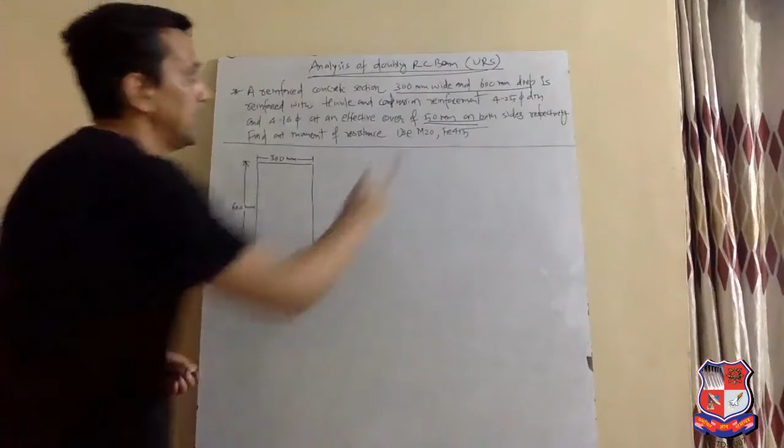It is reinforced with tensile and compression reinforcement, 4 number 25 mm dia and 4 number 16 mm dia, at an effective cover of 50 mm on both sides. This means effective cover on both sides is 50 mm respectively. So 4 number 25 mm dia are in the tensile zone and 4 number 16 mm dia are in the compression zone.

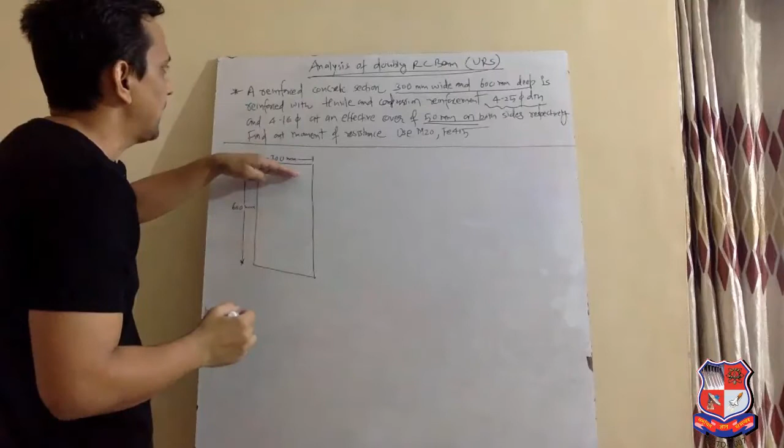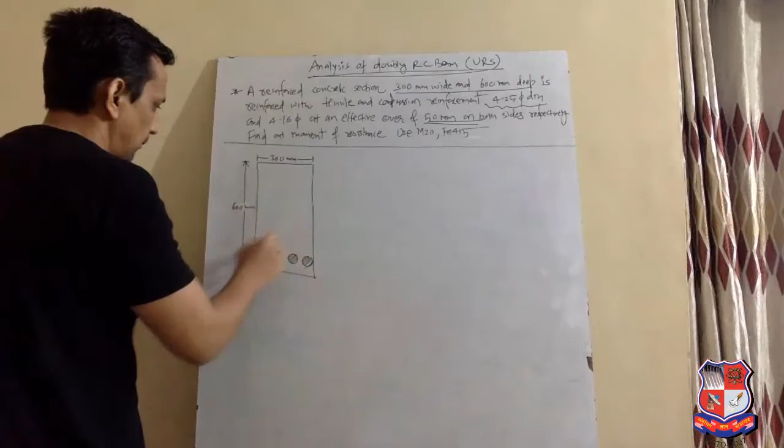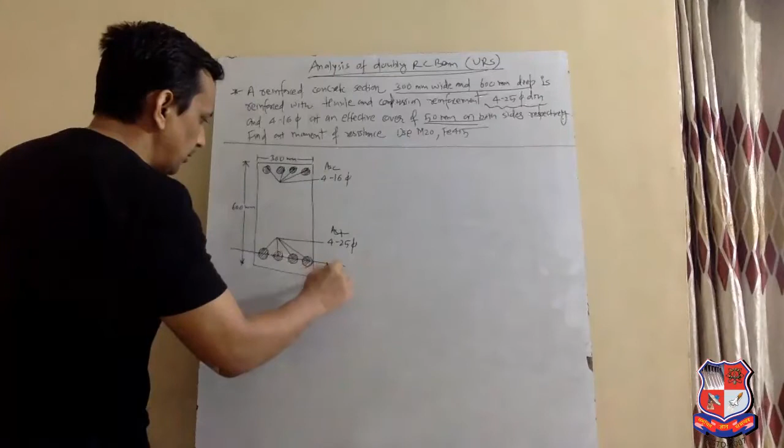Four number 25 dia, four number 16 dia. This is ASC and this is AST. Effective cover on both sides: in tension zone it is called E, 50 mm, and in compression zone it is called D dash, also 50 mm.

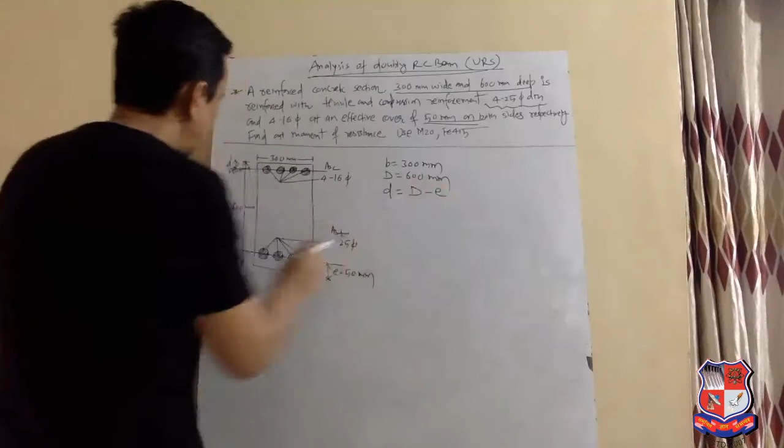So B equal to 300 mm, capital D equal to 600 mm. We need to find small d, meaning effective depth. Effective depth means overall depth minus E. Overall depth is 600 mm minus effective cover 50. So we get effective depth 550 mm.

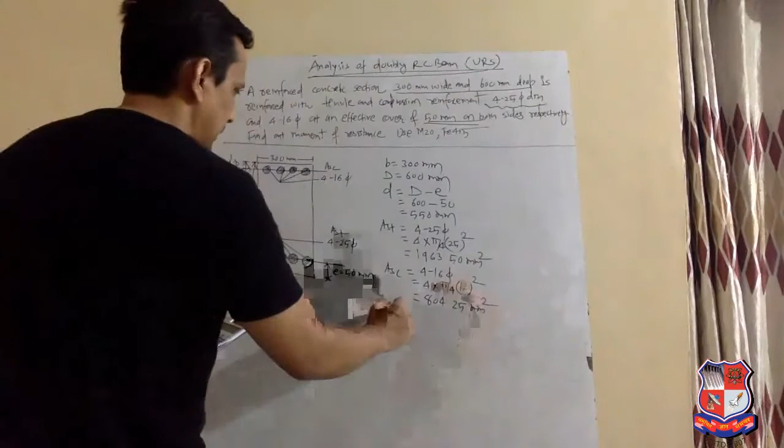Now, in tension zone, 4 number 25 mm dia bars are used. 4 number 25 dia means 4 into pi by 4, 25 square, which gives 1963.50 mm square. And ASC, 4 number 16 dia, 4 into pi by 4, 16 square, gives 804.25 mm square. E is equal to 50 mm and D dash is also 50 mm.

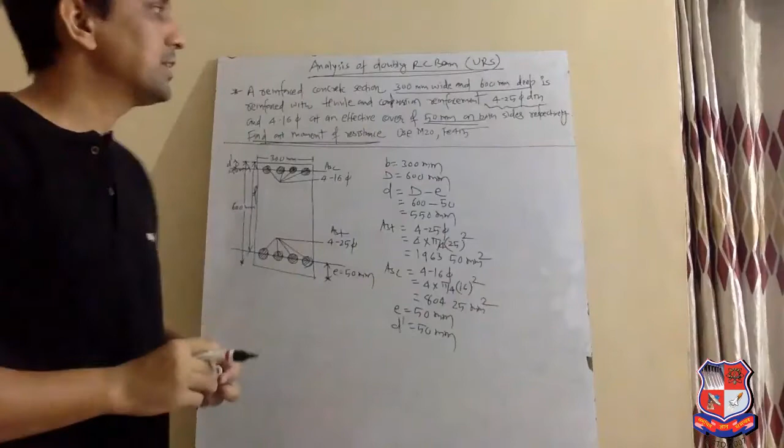So what we need to find is the moment of resistance of the beam. The moment of resistance MR of the doubly RC beam equation is C1Z1 plus C2Z2. MR is equal to C1Z1 plus C2Z2.

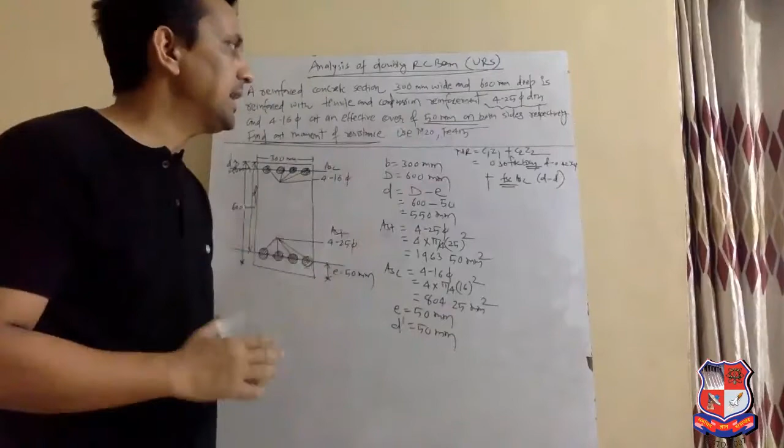We know C1 equals 0.36 FCK B into XU, and Z1 is D minus 0.42 XU, plus C2 equals FSC into ASC, and Z2 is D minus D dash. In this equation, we need to find the unknown values first. XU is the first unknown and FSC is the second unknown. If we find XU and FSC, then we can easily calculate the moment of resistance of the beam. So in this case, first we find the value of FSC.

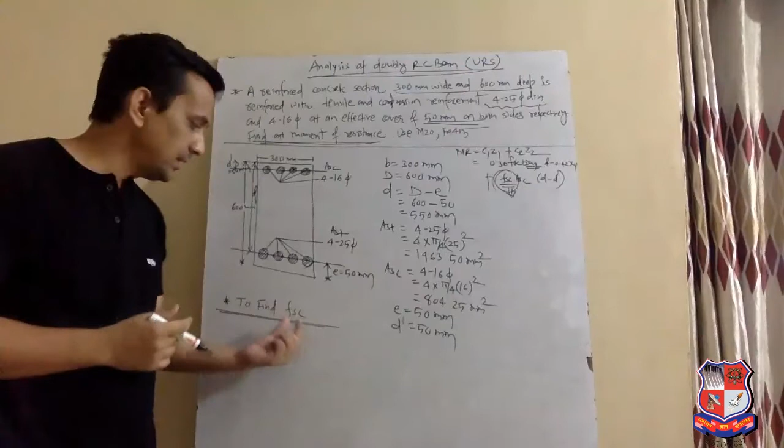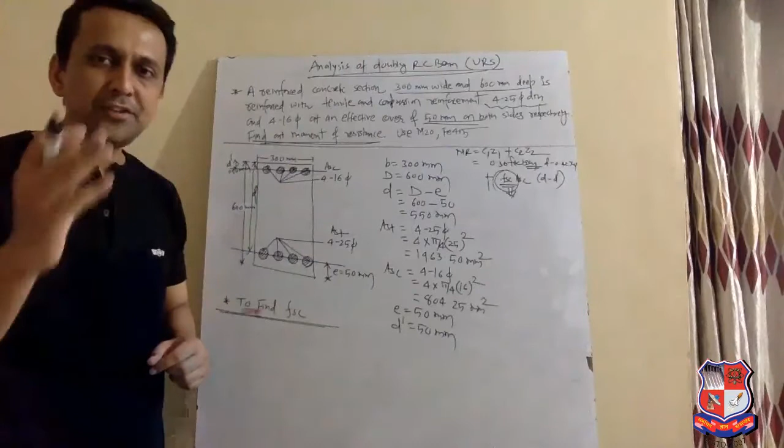To find FSC, there are basically two methods in which we can find the value of FSC. FSC is stress in steel in the compression zone. The first method is using the handbook, and the second method is using IS 456. First, let's find it using the handbook.

In the handbook, page number 13, table F is given. For that, first of all, we need to find the ratio of D dash by D. D dash is given as 50 and the effective depth is 550. When we do this, 50 upon 550, we get 0.09.

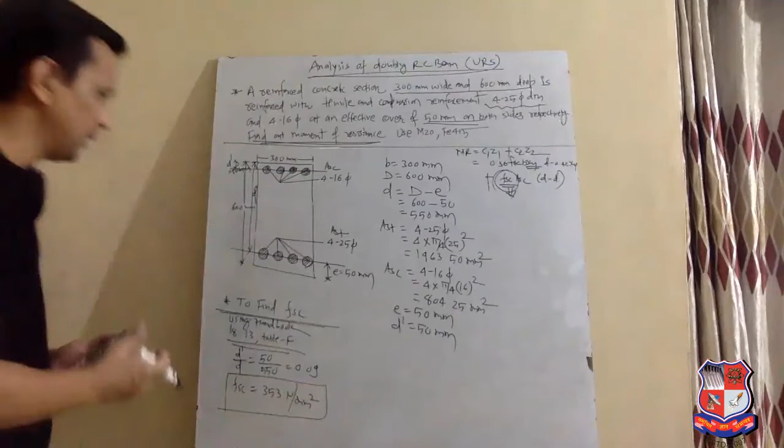From table F, we get the value of FSC directly, and for grade FE 415, it is 353 Newton per mm square. In table F, the value is given for 0.10, but 0.09 is nearly equal to 0.10, that's why we have taken the value at 0.10 as 353 Newton per mm square. In the handbook, it is clearly mentioned that table F is used only for FE 415 and FE 500 grade of steel. If the steel grade is 250, then this value comes as 0.87 Fy.

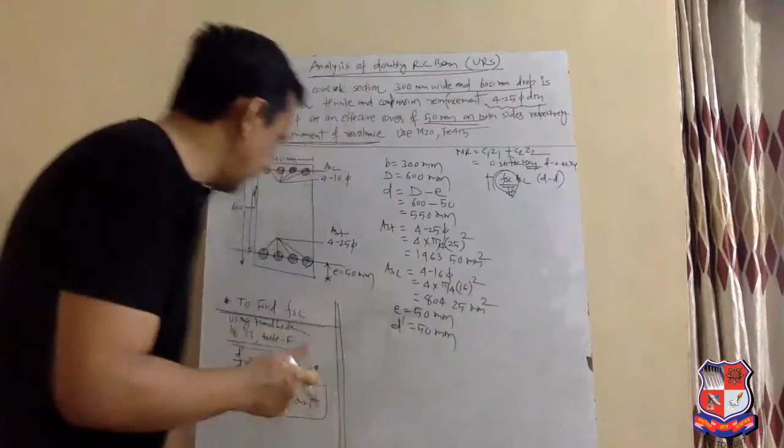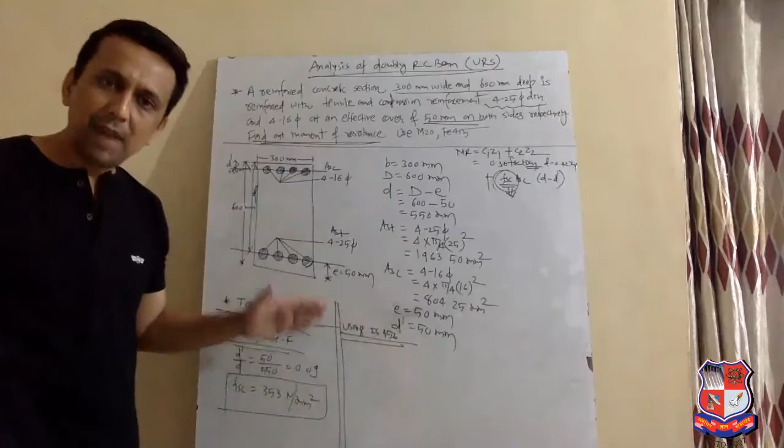From where 0.87 Fy comes, we will see in IS 456 later. Now, to find FSC using IS 456, we are going to find the value of FSC using IS 456.

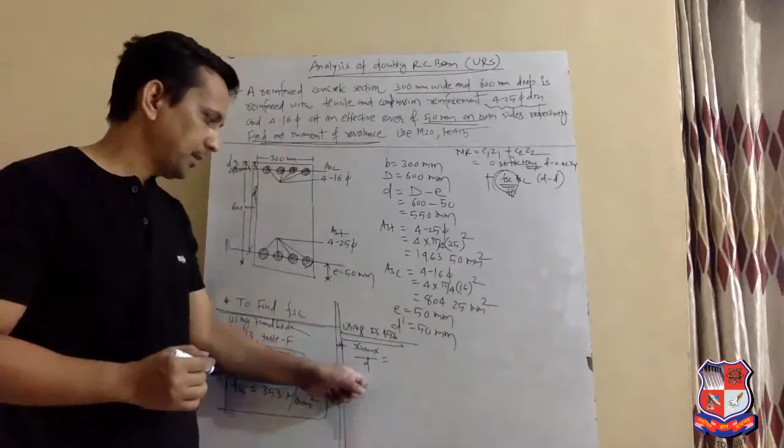For using IS 456 to find the FSC, first of all you need to find XU max, and we know that IS 456 page number 70 gives the value of XU max by D. For FE 415 grade, the value of XU max by D will be 0.48. That's why we get XU max equal to 0.48 into D, which is 0.48 into small d, 550. So we get the value of XU max, 0.48 into 550, equals 264 mm.

After finding the value of XU max, from page number 96 you need to find the strain, and the value given is 0.0035. XU max minus D dash upon XU max is equal to XU max 264 minus D dash 50, upon XU max 264.

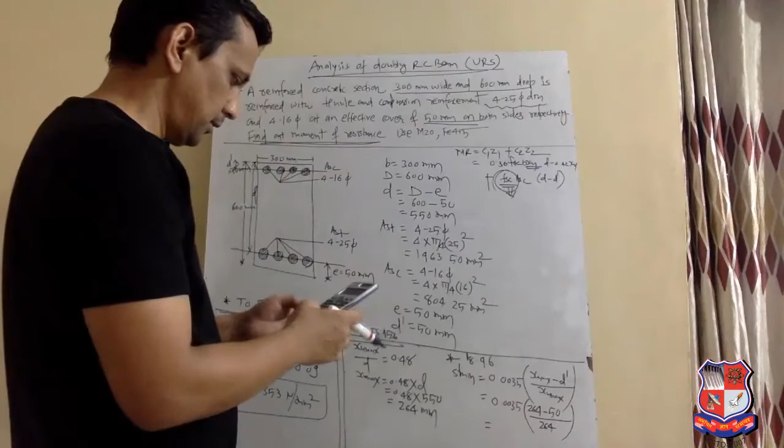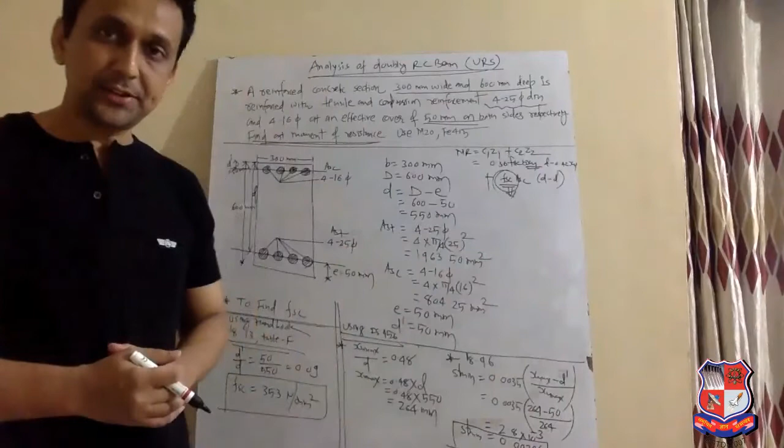0.0035, so we get 2.8 into 10⁻³, or you can say 0.0028. So in this way, we have found out the value of strain, 0.0028. Now, using this strain value, we have to find the value of stress which is given in IS 456.

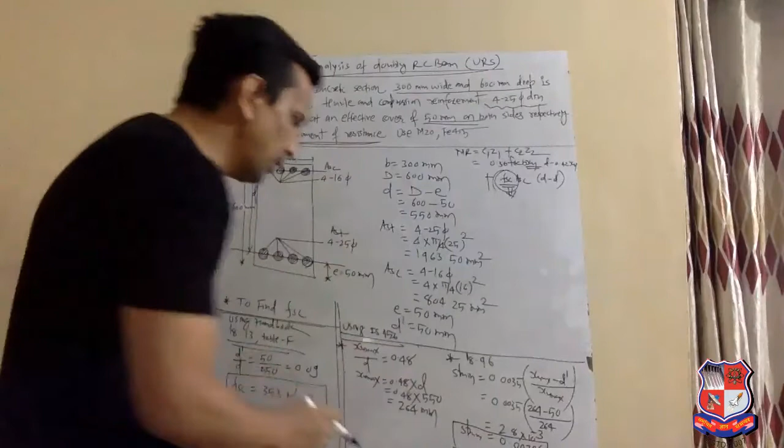Page number 70. Now I am doing this. Alright, from IS 456 page number 70, graph 23 A.

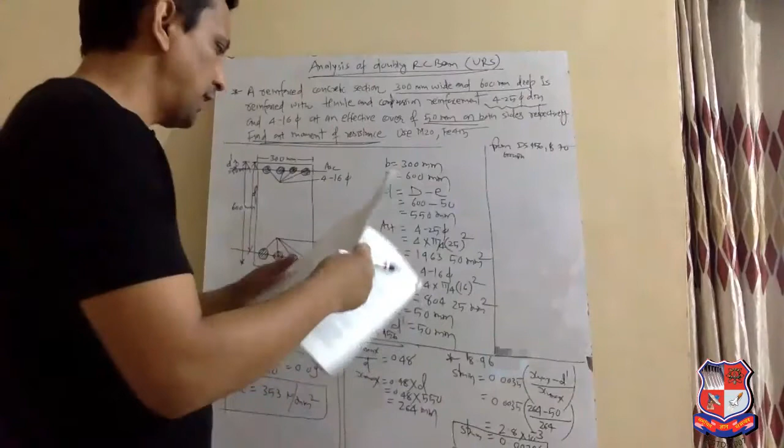In this graph, stress versus strain values are given. It looks like this. Vertical is stress and horizontal is strain. And our value comes near to 0.003.

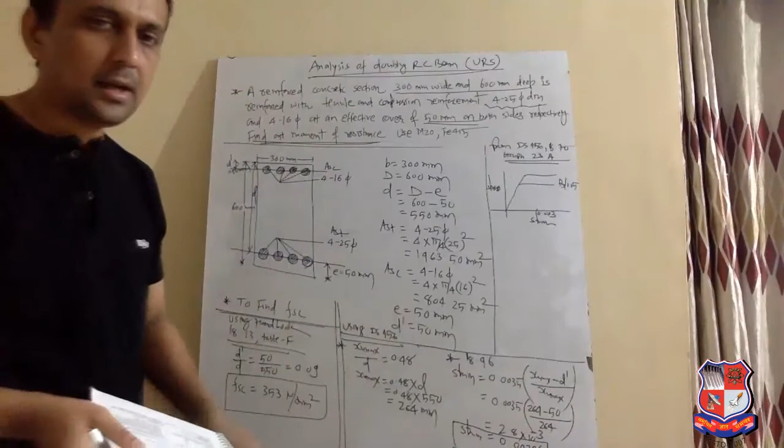Our value of strain is 0.0028, and the value of strain in IS 456 is given for 0.003. So we take it nearly equal to this.

First, what you need to do is draw a parallel line with this line, and this parallel line where it intersects the Fy upon 1.15 line, corresponding to that intersecting line, you have to find the stress value at vertical.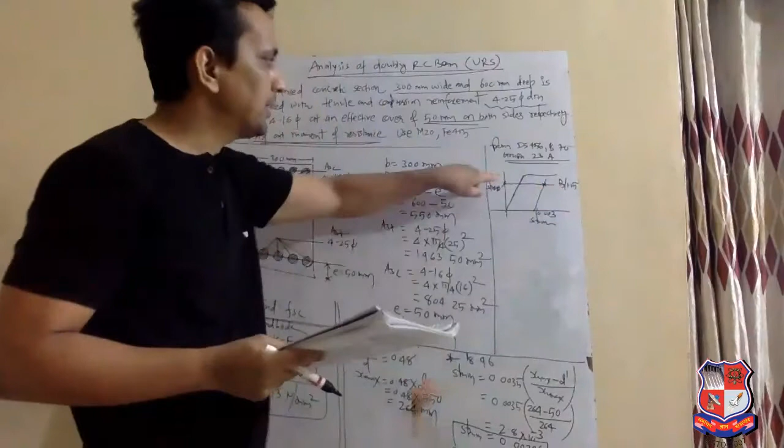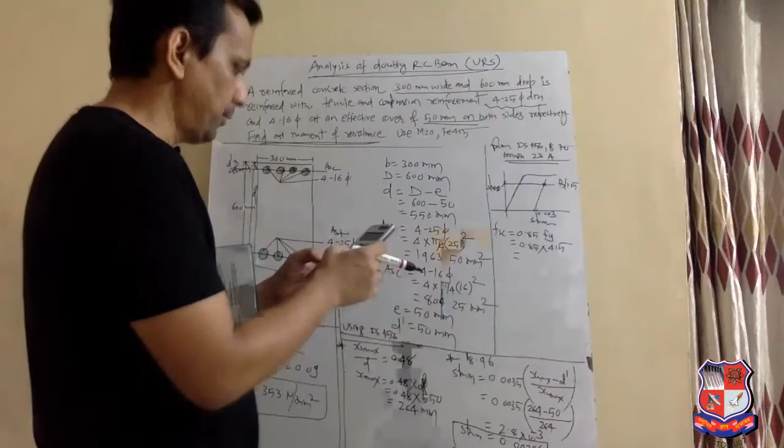So in our case, it comes FSC equal to 0.85 Fy. So in this way, we get 0.85 into 415, which gives 352.75, nearly equal to 353 Newton per mm square.

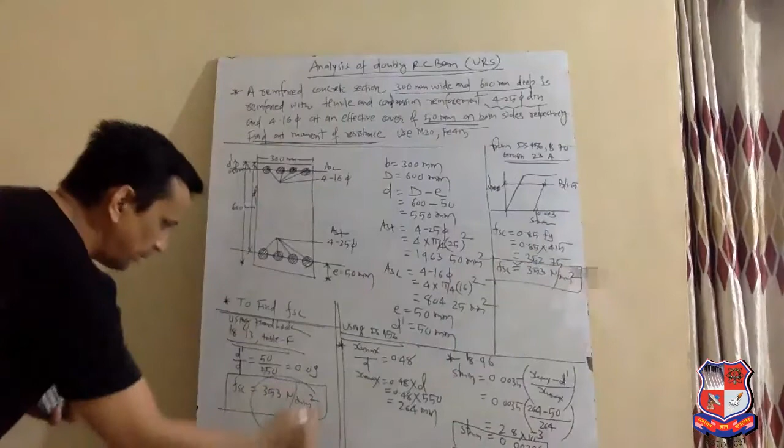Using handbook, value comes 353, and using IS, also value comes 353. Why have I found it using IS 456? Because in some colleges, handbook is not permitted. That's why in that case, you should know how to calculate the value of FSC using IS 456.

Again, I repeat, for finding FSC using IS 456, first you need to find Xu max which is given in IS 456 page number 70. Then you need to find the strain value. The equation of strain value is given in IS 456 page number 96, and the equation is 0.0035 bracket (Xu max minus D dash) upon Xu max.

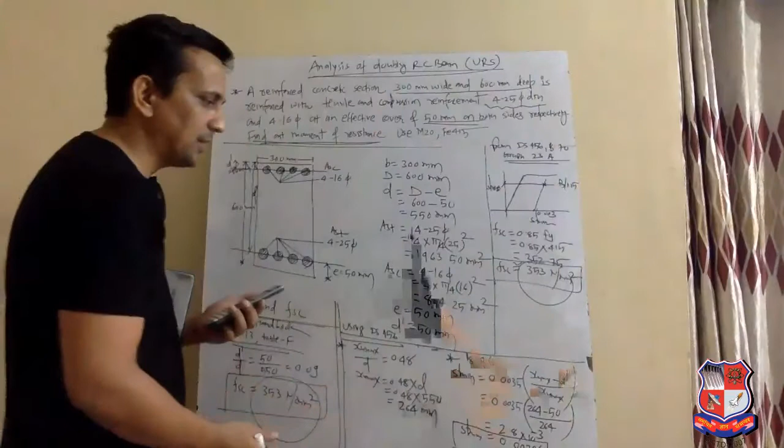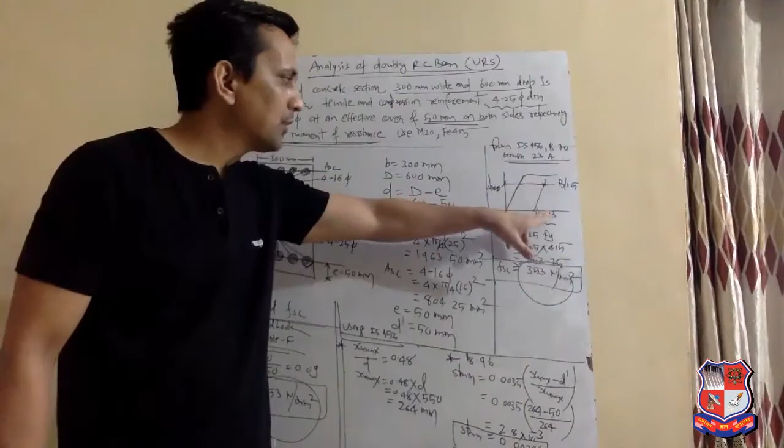Putting all the values, we get the value of strain equal to 0.0028. Now, with respect to this strain value, from page number 70, graph 23A, you have to find the FSC. So the graph is about stress versus strain.

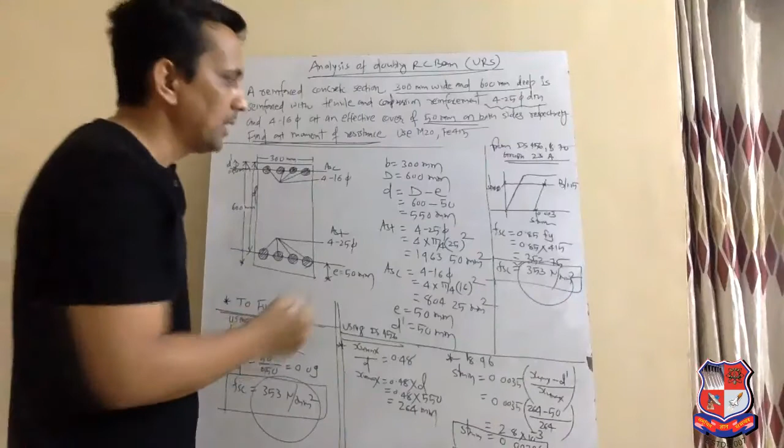In the graph, the value corresponding to strain 0.003 is given. Our strain value has come to 0.0028, so it will come almost near to 0.003. So what you need to do is draw a parallel line from our corresponding strain, and that parallel line where it intersects the Fy upon 1.15 line, corresponding to that, you have to find the stress value.

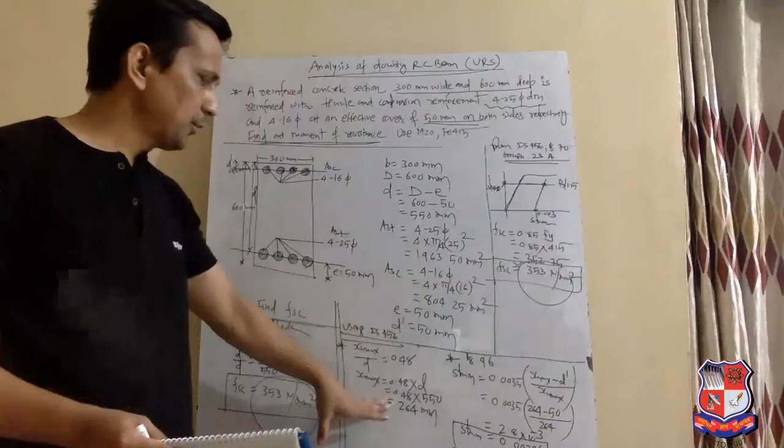When you look at graph 23A, you will find the stress value 0.85 Fy, and putting the value of Fy, you will get the value of FSC. So in this way, using IS 456, we can get the value of FSC.

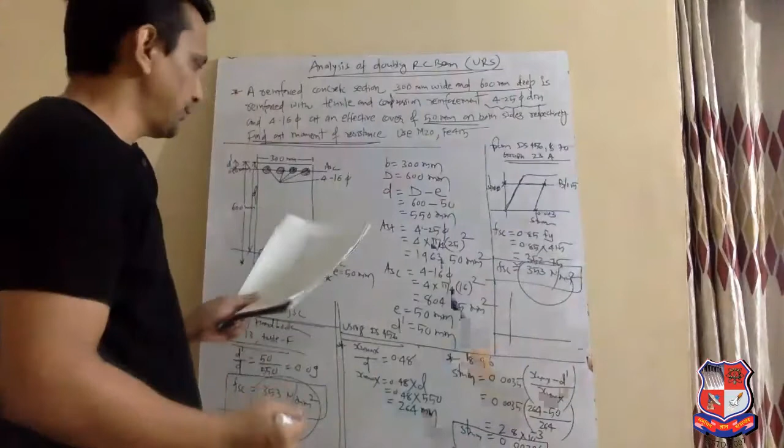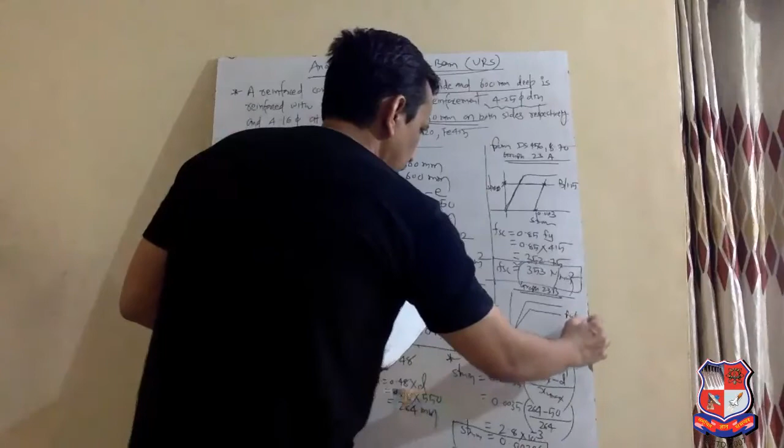Now, in IS 456 page number 70, graph 23B is given like this. This is for Fy upon 1.15. See, graph 23A is for Fe 415 and Fe 500 grade steel, and graph 23B is for Fe 250, meaning mild steel grade.

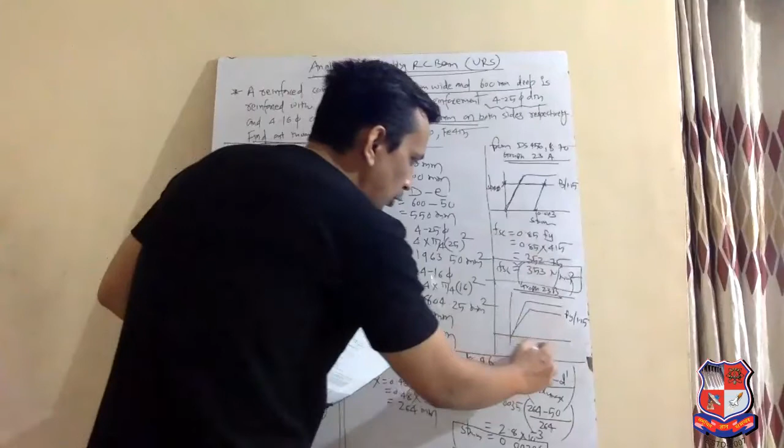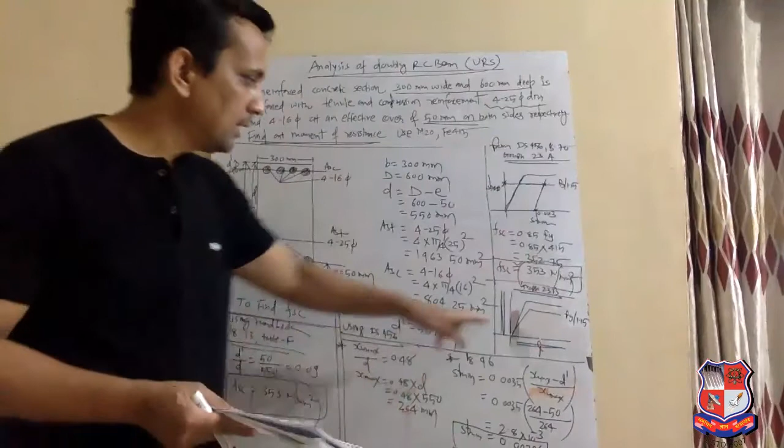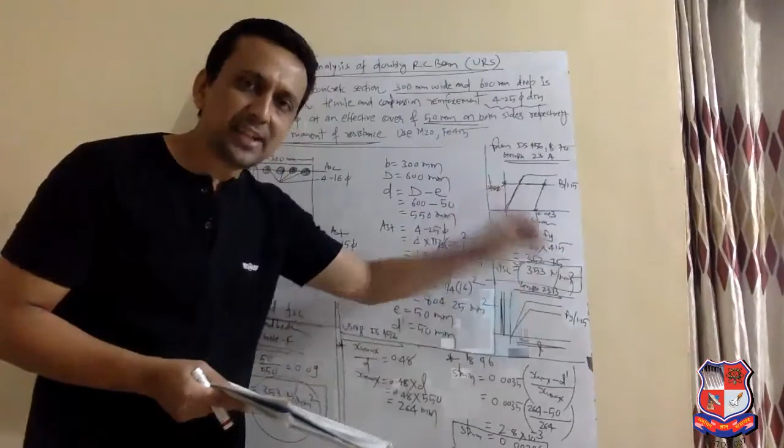When you observe this graph, you will realize there will be no value of strain here, and no value of stress written on the vertical face. What does that mean? It means that for any value of strain, we will get the stress value equal to Fy upon 1.15.

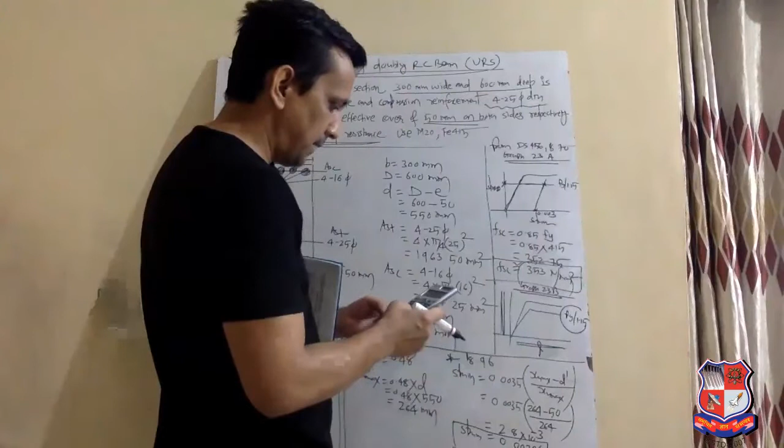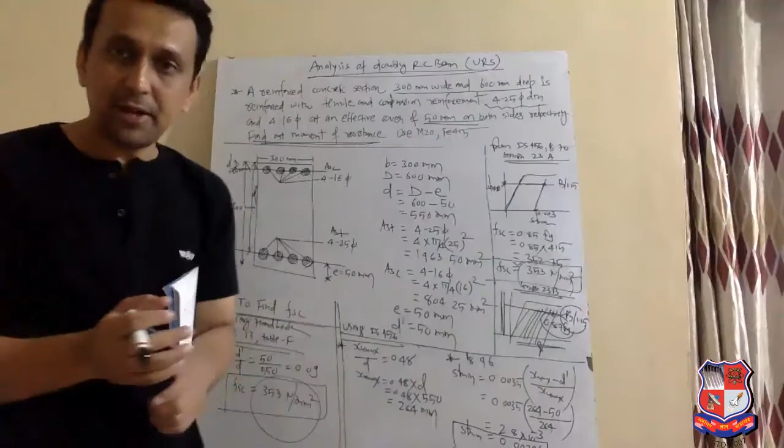Now, Fy upon 1.15 means what? 1 divided by 1.15 is equal to 0.87 into Fy. Meaning whatever value of strain, when we draw the parallel line, we will get the value 0.87 Fy. That's why in the handbook, page number 13, it is clearly written for Fe 250 grade of steel, the value of FSC will be 0.87 Fy.

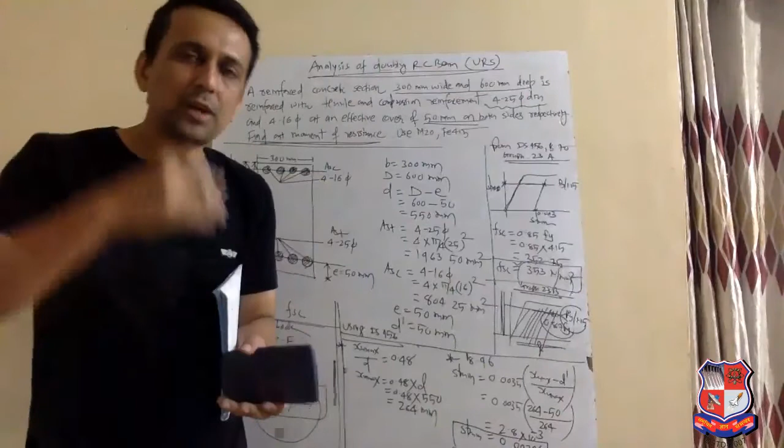Because the handbook is made using IS 456, whatever they have written in the handbook, they have used the help of IS 456, right? So in this way, we get FSC.

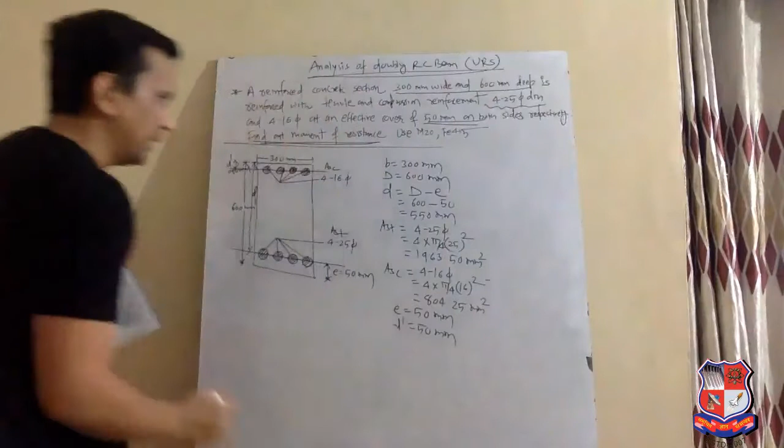Now, let's move. So FSC we get 353. So in analysis of DRC beam, first you need to find the value of FSC. Then, the next is to find the value of Xu.

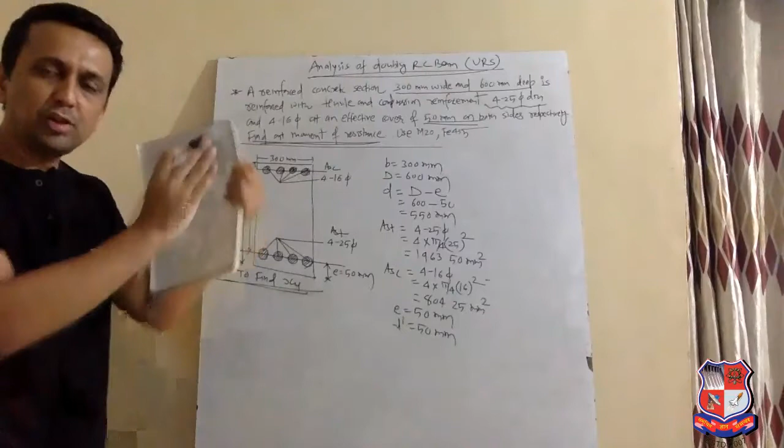Yes, the depth of neutral axis. So how do we calculate the depth of neutral axis? By equating total compression equal to total tension. So in DRC beam, total compression is equal to total tension.

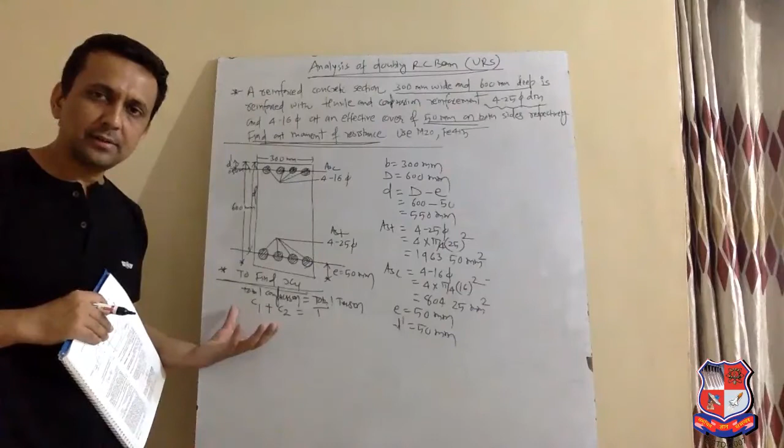Total compression force in singly RC balance section. And what is C2? Total compression force in auxiliary section. Now write the value of C1.

0.36 FCK B into XU plus C2 FSC into ASC is equal to T, means 0.87 FY AST. Now put all the values: 0.36 FCK is given 20, width of the beam is 300 mm, and our interest is XU. We have already found FSC as 353. And what about ASC? ASC is given.

804.25 is equal to 0.87 FY, given as 415, and AST is given as 1963.50. That's why when we calculate this: 0.87 into 415 into 1963.50 minus 353 into 804.25, divided by 0.36 into 20 into 300, we get the value of XU.

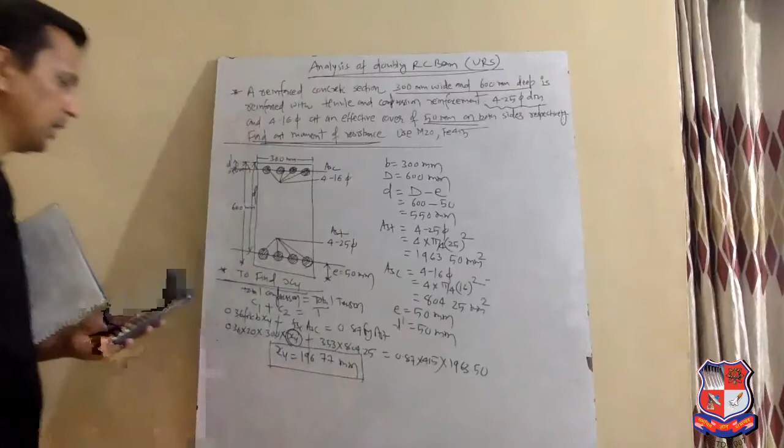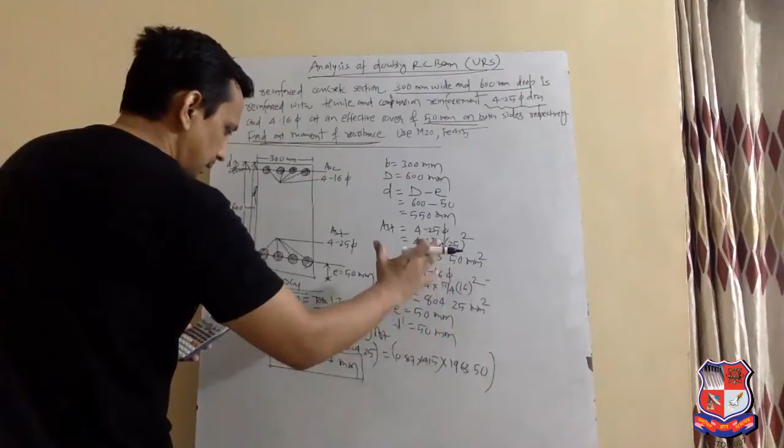196.77 mm. What you do is first calculate this, then whatever value comes, subtract this, then divide that value by this - in this way you get the value of XU.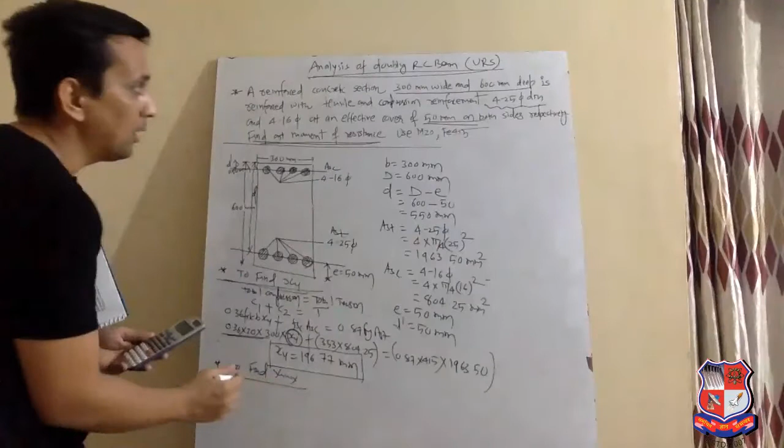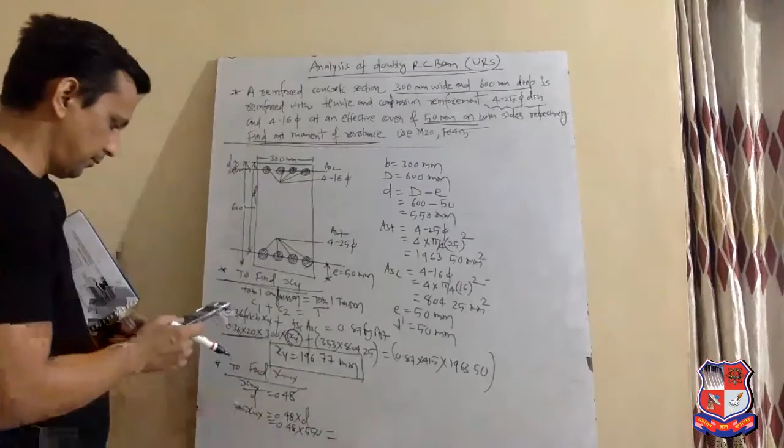Now the next step is to find XU max. In this example, to find the value of FSC, we have already calculated XU max. And what was that value? XU max by D equal to 0.48. Therefore XU max equal to 0.48 into D, equal to 0.48 into 550, so we get 264 mm.

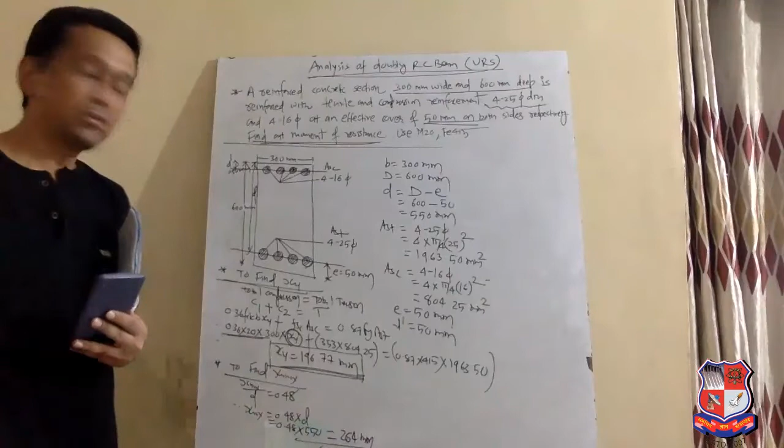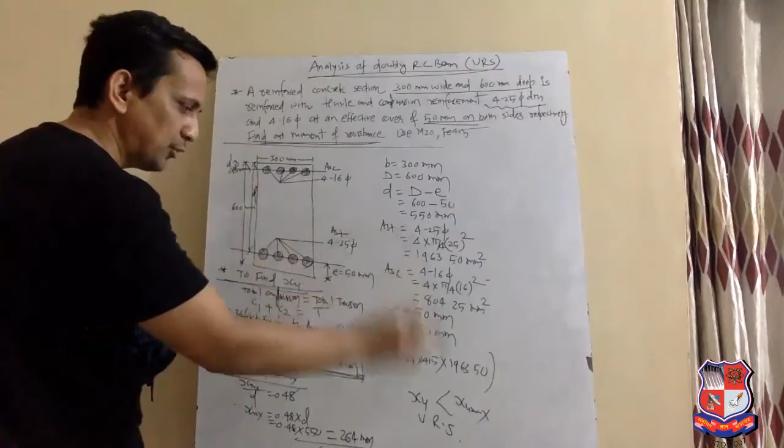XU is 196.77 and the value of XU max is 264. So here XU is less than XU max. When XU is less than XU max, it means our section is under reinforced section. So first we found the value of FSC, then we found the value of XU, then XU max, then compared the value of XU and XU max. On the basis of that, you will get whether the section is URS or ORS.

In our case, the section has come as under reinforced section. Then, finally, to find MR, the equation of moment of resistance is C1Z1 plus C2Z2.

C1 is 0.36 FCK B into XU into Z1, means D minus 0.42 XU, plus C2 FSC into ASC into Z2, which is D minus D dash. Putting all the values.

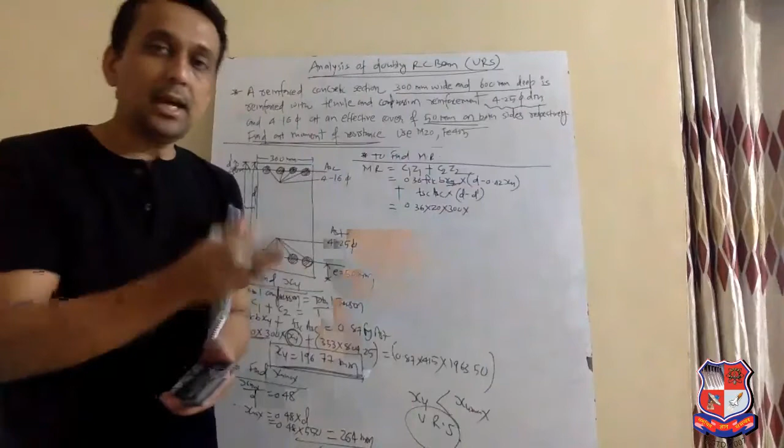FCK is 20, B is 300, now here XU - in case of URS, put the value of XU, and if our section came ORS, then put the value of XU max instead of XU. In our case, our section has come URS, that's why in the equation we have written XU.

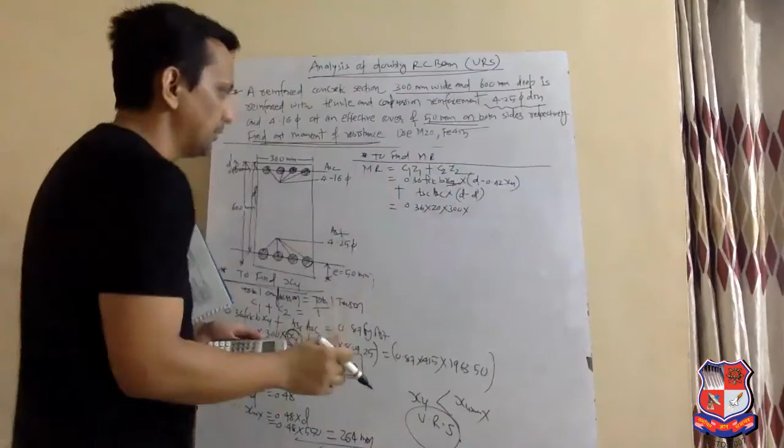So what is the value of XU? 196.77, into our effective depth 550, minus 0.42 into 196.77, plus FSC 353 into ASC 804.25, into D minus D dash, 550 and 50. Now calculate this.

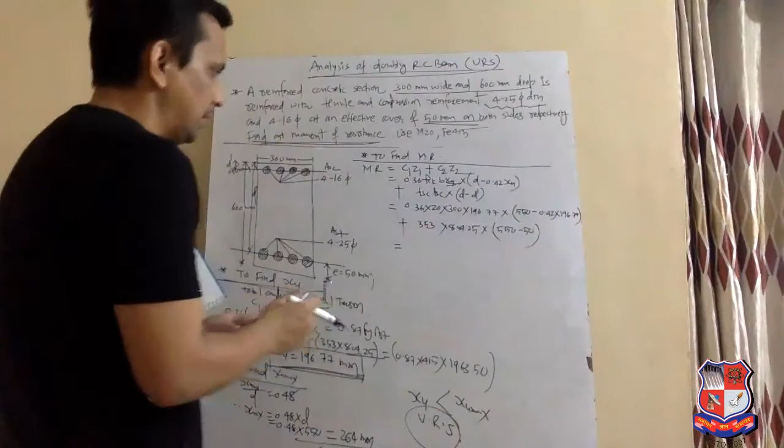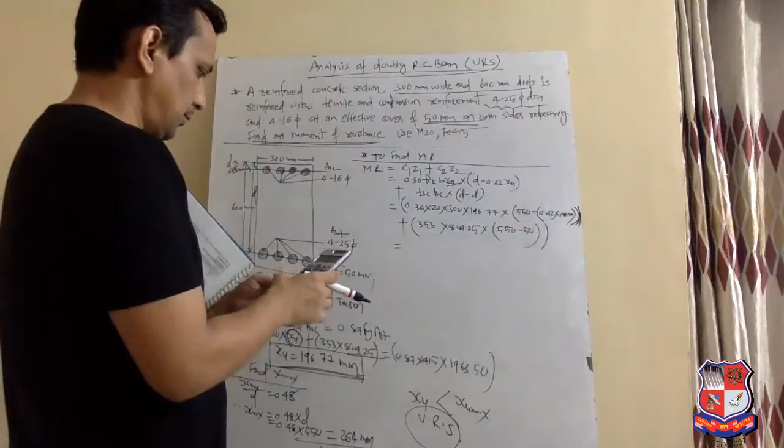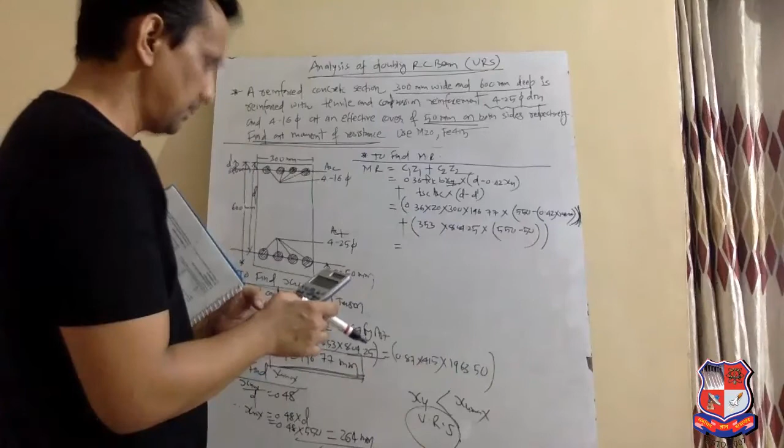So let's calculate: 0.36 into 20 into 300 into 196.77 into bracket 550 minus 0.42 into 196.77, plus bracket 353 into 804.25 into, you can directly write 550 minus 50 which comes to 500, into 500, bracket over.

So in this way, we get 340.58 into 10^6 Newton into millimeter, and when you convert this to kilonewton into meter, you get 340.58 kilonewton into meter. So in this way, we can calculate the moment of resistance of the DRC beam.

Now let me summarize this example. To find the moment of resistance of the beam, first you need to find the value of FSC. FSC you can find two ways: one option is using a handbook, and the second option is IS 456. Then to find the value of XU in a DRC beam, you have to equate total compression is equal to total tension. In the case of singly RC beam, the equation of XU is directly given in IS 456, but in a DRC beam, you have to use the equation total compression equals total tension, and using that equation you get the value of XU.